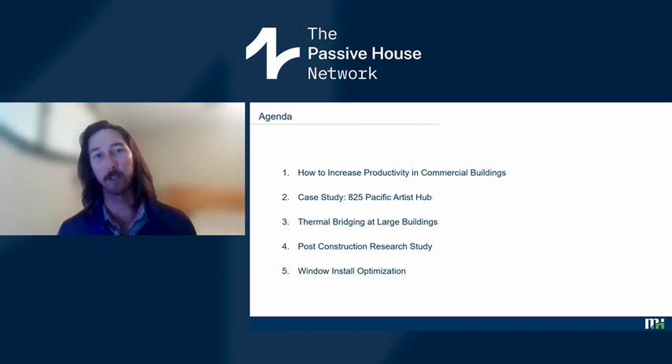The agenda for today: first, how to increase productivity in commercial buildings. Then I'll dive into a case study with a building called 825 Pacific Artist Hub. Then some background information on thermal bridging at large buildings. After that, a post-construction research study based on 825 Pacific Artist Hub, and we'll finish with window install optimization techniques.

Before getting into the case study, I wanted to mention how passive house design principles will improve work productivity, allowing occupants to focus with less distraction from better soundproofing, reducing street noise, improving indoor air quality, and enhancing occupants' perception that they are comfortable and can focus on the task at hand at their office.

This can all be achieved with the isolator, an invention from 1925 by science fiction writer Hugo Gernsback. He felt absolutely plagued with distractions in his office and decided enough was enough. The isolator's mask construction followed passive house design principles: thermal insulation as a vibration buffer, high performance vision area visible through his goggles, an airtight, thermal bridge free enclosure with constant controlled clean air supply. Even the exhalation ports have similarities to heat recovery ventilation cores. And as a bonus, this looks great with any outfit.

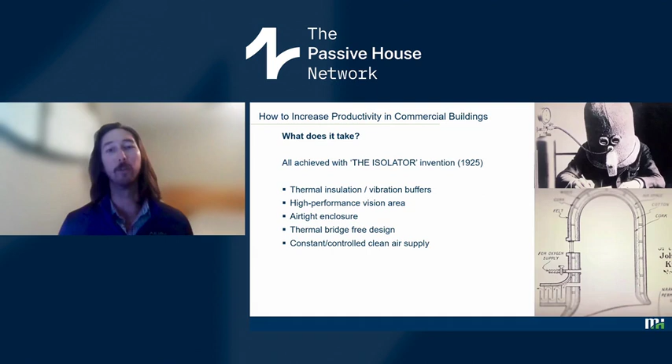But I know masks can be a polarizing subject, as we've seen as of late. So we need to find a more practical solution to increase productivity in the office.

An alternate option is just to build a certified passive house. You can convert the whole building enclosure into the isolator, controlling interior conditioned air with a heat or energy recovery ventilation system, which supplies constant filtered fresh air, exhausting CO2 buildup and airborne viruses.

That's exactly what we did for 825 Pacific Artist Hub. This building was completed in fall of 2021, located in downtown Vancouver, BC, Canada. It's 7 levels plus a 1-level basement of non-combustible construction, which came with new challenges due to high-rise requirements for building enclosure design. It's currently the tallest certified passive house commercial building in Canada, owned by the City of Vancouver and operated by a not-for-profit affiliate.

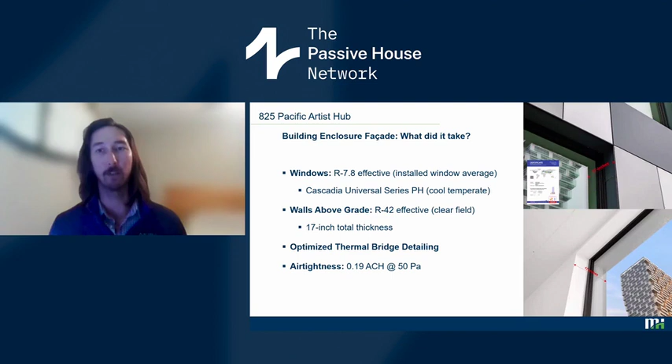Here I've listed the building enclosure facade highlights. The window system thermal resistance is R7.8 effective, and the 17-inch thick walls are R42 effective. The facade design and whole building mitigated heat loss at thermal bridges wherever possible, achieving a great final air tightness result at 0.19 air changes per hour.

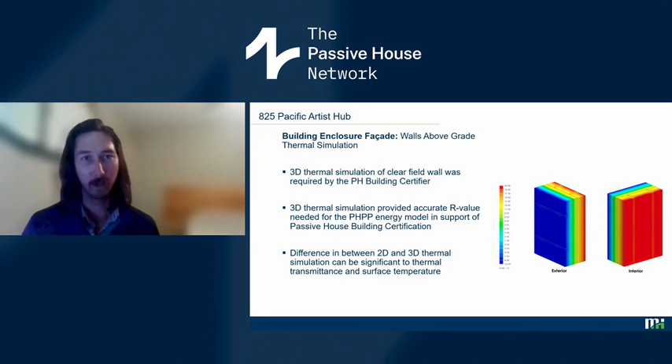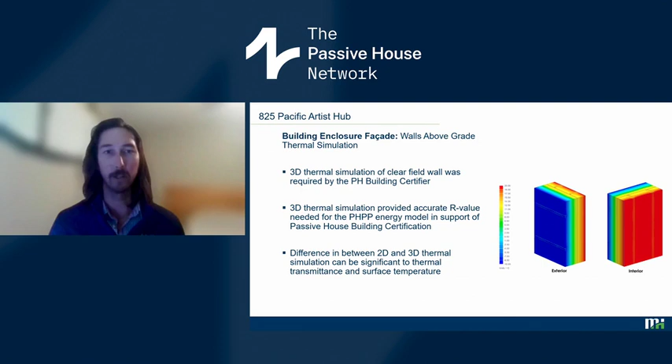For 825 Pacific, MH used a 3D thermal simulation tool for the clear field wall to accurately determine the R value for the energy model, in support of certification required by the Passive House Building Certifier. The 3D thermal simulation was needed because the steel stud framing and cladding attachment brackets impact heat flow in ways that cannot be accurately captured with other methods in 2D. The differences between 2D and 3D thermal simulation can be significant to thermal transmittance and also interior surface temperature.

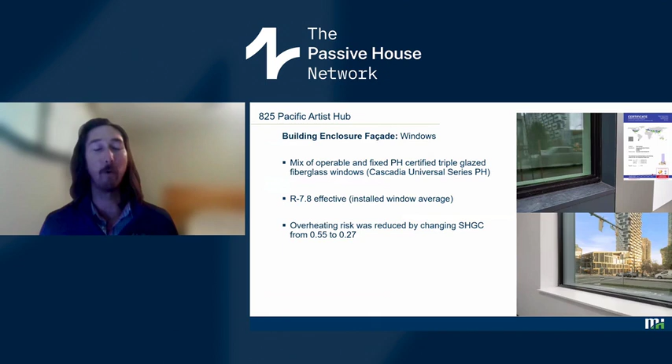Passive House certified triple glazed fiberglass windows by Cascadia were specified, and overheating risk was reduced by changing the solar heat gain coefficient from 0.55 down to 0.27.

Cascadia's fiberglass frame material is combustible, so to install this in a high-rise building, the design had to comply with building code requirements to reduce the chance of fire spread between neighboring windows.

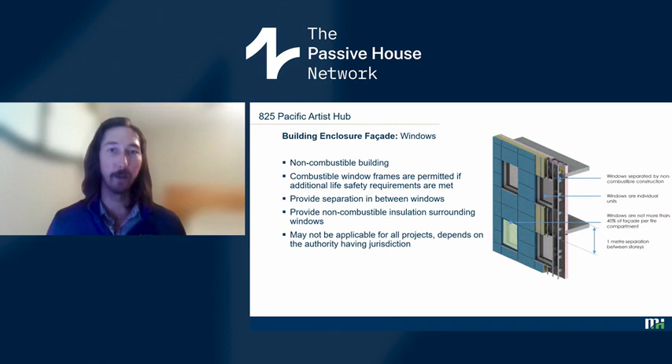The architect's adjustment to the window-to-wall ratio complied with additional life safety building code requirements, and all of this satisfied the City of Vancouver's building department.

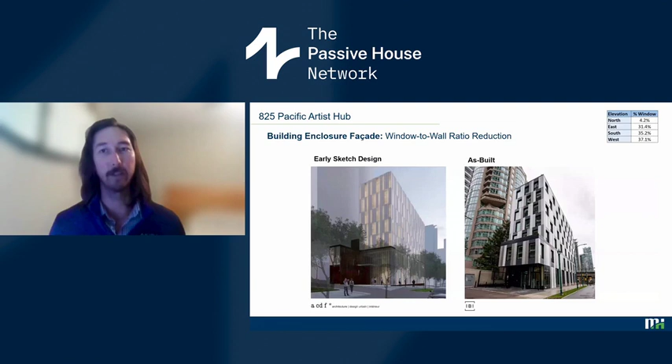For this project, an early stage study conducted by the project architect, IBI Group, refined window-to-wall ratios on all facades and changed the window layout to eliminate narrow windows to decrease heat loss at the window-to-wall transitions.

Due to limited views towards the north, facing an adjacent hotel, the design team decided to locate the stairs, elevator core, and the service rooms along the north facade, shown on the bottom left elevation.

This suited energy conservation strategies by minimizing windows on the north side, reducing heat loss, and improving overall window energy balance by maximizing solar heat gain on the other facades.

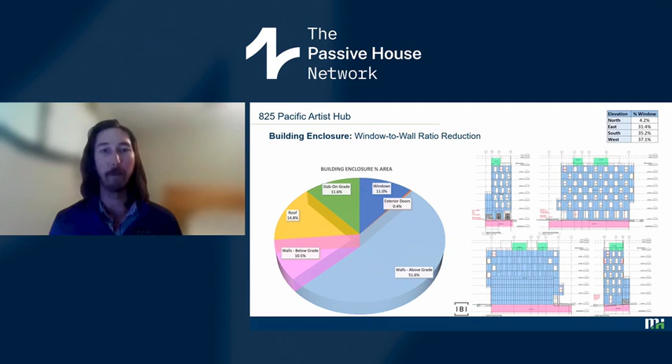Typical of all high-rise buildings, the majority of building enclosure area will be the above-grade walls, which is 51% of the total building enclosure surface area.

The as-built design ended up with 11% windows based on the total building enclosure surface area, but they caused 32% of the heat loss through the building enclosure.

Besides the exterior doors, windows are the only component that disproportionately increase heat loss relative to the surface area because of the windows' poor thermal performance compared to the well-insulated walls, roofs, and floor assemblies.

This is why early stage studies to reduce window-to-wall ratios is an effective strategy to conserve energy. But just like any other building, windows are integral. They connect us to the outdoors, they transmit natural light, and they allow for passive solar gains.

But to improve building energy performance, we need to pay more attention to the window's placement, and that is the recommendation we give on all our projects.

Once window-to-wall ratios and the building enclosure assemblies were established, the project team needed to adjust thermal bridges to account for all heat loss through the building enclosure.

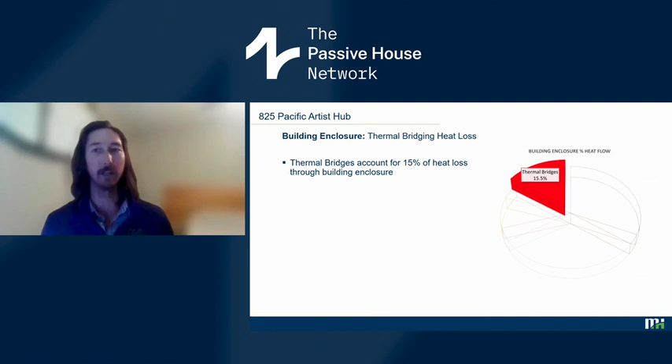Thermal bridges accounted for about 15% of the heat loss through the building enclosure. This is a large piece of the pie considering all thermal bridges were mitigated in the design.

An accurate determination of thermal bridge values for the energy model was a significant factor to the overall building design, in support of Passive House building certification. Using inaccurate thermal bridge values would have unjustly inflated space heating, cooling, and the primary energy renewable demand, the total energy, which may have led to even thicker external walls.

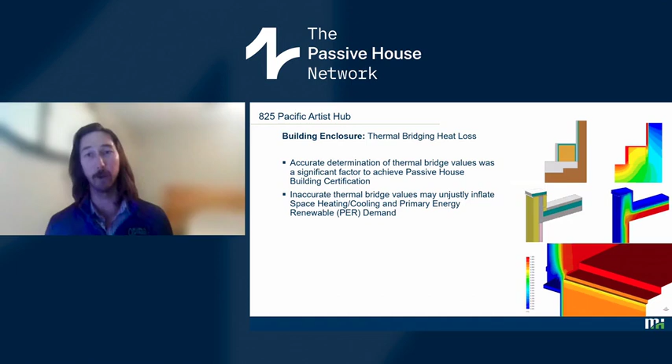This signals where improvement should be focused if needed, because basically all the other thermal bridges on the project combined almost add up to this one window to wall transition thermal bridge. So really this is the low hanging fruit where you'll see the most benefit out of optimization or improvements to that detail.

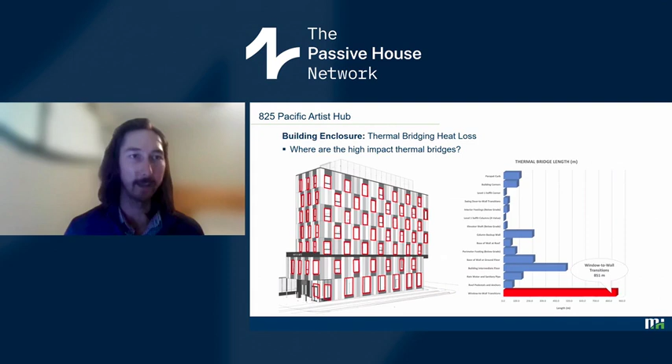High impact thermal bridges are typically the ones with the largest length or quantity. Window to wall transitions often have the largest interface length as shown with the red bar on the bottom right. Windows significantly outweigh all the other lengths of thermal bridges at 851 meters for this particular building.

Now I'd like to review some of the thermal bridges at 825 Pacific and what we did to mitigate the heat loss. This project used an inverted roof system with 8-inch thick XPS rigid insulation that had numerous penetrations from screen posts that surrounded the mechanical units on the rooftop and rooftop anchors at the various terraces and upper roof. The general contractor, Legcor, their superintendent reported some positive feedback using the Armatherm thermal breaks.

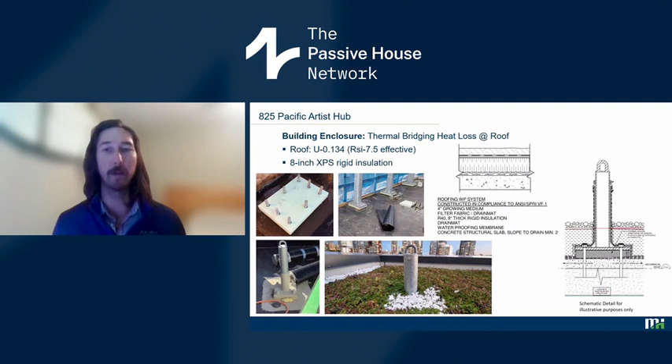Legcor sent Armatherm the size and bolt locations, so all the thermal breaks arrived on site with pilot holes ready for installation. In MH's experience, Armatherm thermal breaks should be minimum 2 inches thick to have a meaningful impact to mitigate thermal bridge heat loss.

At the front entrance vestibule, which is outside of the conditioned thermal space or thermal boundary, if you take a look at the photo on the left, the vestibule concrete curbs were placed on the left and the right of the vestibule, so the concrete floor slab could be placed directly over the 8-inch XPS roof insulation above the heated basement, to mitigate thermal bridge heat loss to only the curbs instead of losing heat from the entire slab if that was placed directly over top of the basement.

For the typical footings, because we have a raft slab, the structural engineer didn't want any insulation, or the footings, or the mass amount of weight of this building to be bearing on anything but concrete or the soil. So to mitigate heat loss, we needed to extend the vertical insulation as far down the foundation wall as we can below the slab on grade junction, which is about 5 feet in this project.

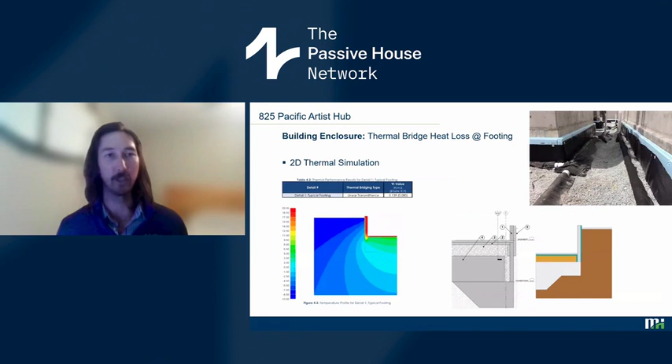And that was with 5 inches of XPS on both the interior side and exterior side of the foundation wall.

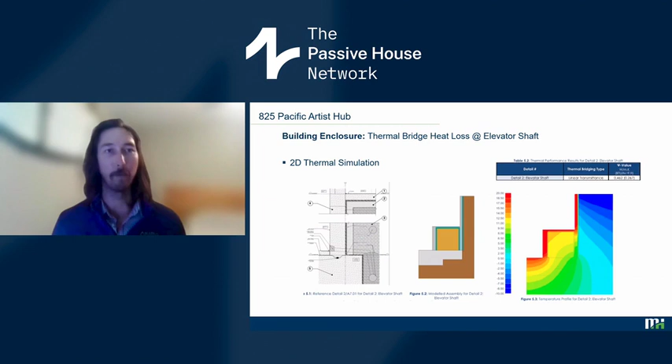We used the same strategy at the footings around the elevator core, which is very similar detailing with 5 inches of XPS on the inside and outside of the foundation walls, running down and basically stopping at the top of the raft slab.

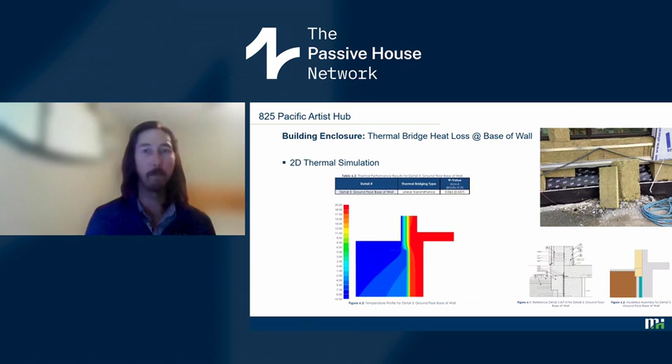The ground floor base of wall detail eliminated through-wall metal flashings to mitigate the thermal bridge, similar to what we saw before on the upper through-wall flashings, where basically we used a peel and stick membrane flashing that sloped away from the building with a tapered mineral wool insulation, trying to install that insulation to have no voids or gaps.

And then with the parapet wall or curbs, when we were on site, we wanted to verify that rigid insulation was installed over the parapet walls prior to the vapor peel and stick membrane to maintain thermal continuity.

So in the end, 825 Pacific Artist Hub achieved Passive House certification awarded by the Passive House Institute.

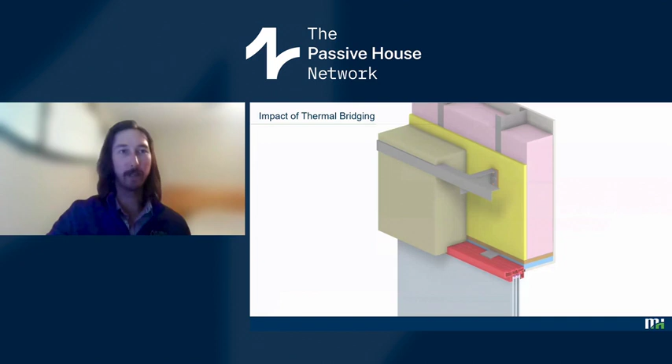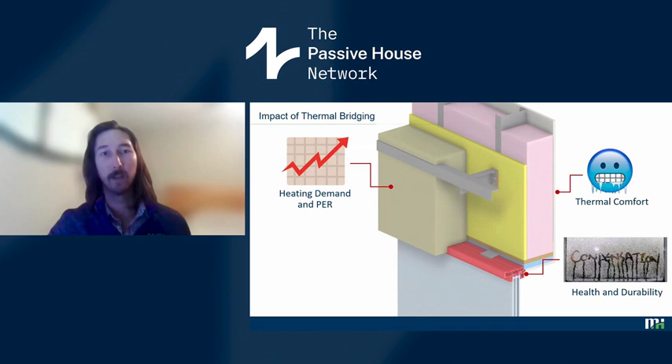So now I'm going to dive into some background on thermal bridging at large buildings. Thermal bridges are a big deal. They can impact your heating demand and total energy demand, which is PER. They can impact occupants' thermal comfort, both occupants and the building itself's health and durability, and thermal bridges will definitely impact our choices for materials and construction.

For those not familiar with assessing thermal bridges to determine what is a good, bad, or ugly value for linear transmittance, this table gives you a general sense of the range. Punch window default install thermal bridges are set at 0.04 watts per meter Kelvin in both Design PH and PHPP until refined by the PH consultant. Good window installations can reduce the thermal bridge to less than 0.01, while bad detailing can lead to values above 0.1.

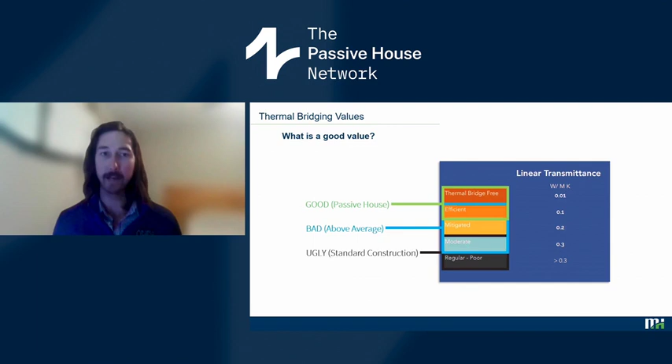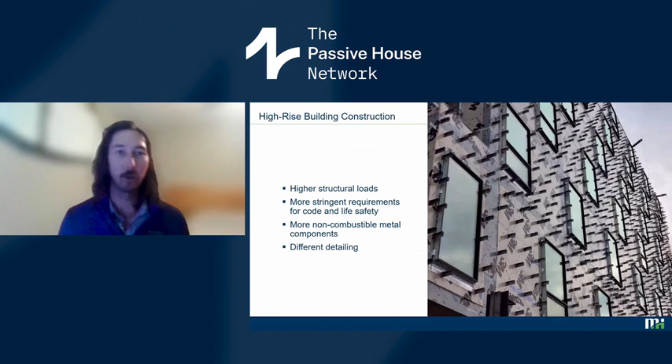Now, when you're dealing with high-rise building construction, you're going to deal with higher structural loads. You're going to use stronger materials like concrete and metal, and windows tend to be aluminum framed. They need to pass higher wind load requirements, water penetration tests, and air tightness requirements. These larger buildings also have more stringent requirements for code and life safety, so generally they need to use non-combustible components.

For cladding attachment systems, we need to focus on reducing thermal bridging, and they also need to support the structural loads for the cladding dead load and wind load. Considered as a secondary structure with influence on thermal performance, we must evaluate our cladding attachment system based on both structural and thermal performance.

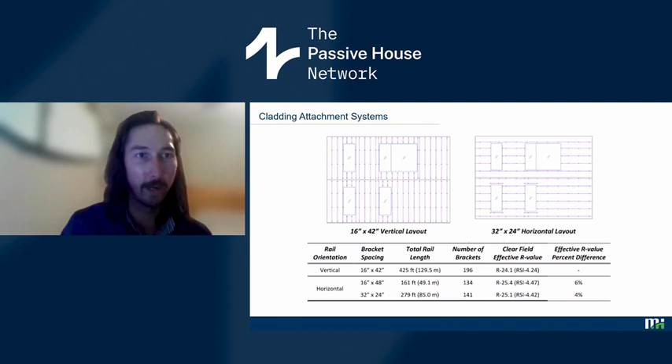Cladding selection and layout will influence the rail orientation and bracket spacing determined by the facade engineer. This is just one example showing the differences in performance between the same wall facade with vertically oriented rails versus horizontal on the right. If you look at this table at the bottom, essentially if you were to switch the orientation to horizontal, we see a slight improvement in effective R value from the vertical rail going from R24.1 to, if oriented horizontally, up to 25.4, so a 6% increase in R value.

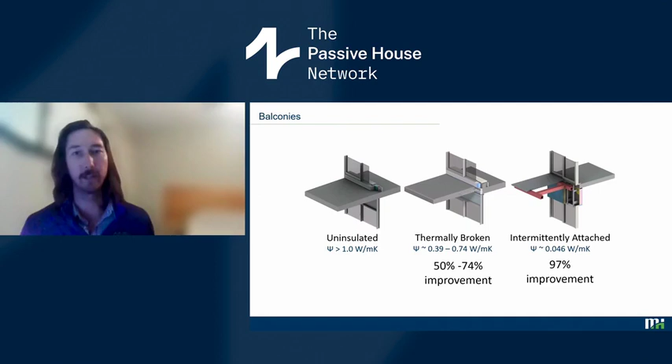As previously mentioned, high impact thermal bridges are typically the ones with the largest length or quantity. For multi-unit residential buildings, balconies often have the largest interface length that must be considered early in the design stage to mitigate heat loss.

But for office buildings that generally don't have balconies, or have a limited amount, the intermediate floors often have the largest interface length that must be considered early in the design stage. But for all large buildings, the window to wall transitions generally have the largest interface length, as shown with the 825 Pacific case study.

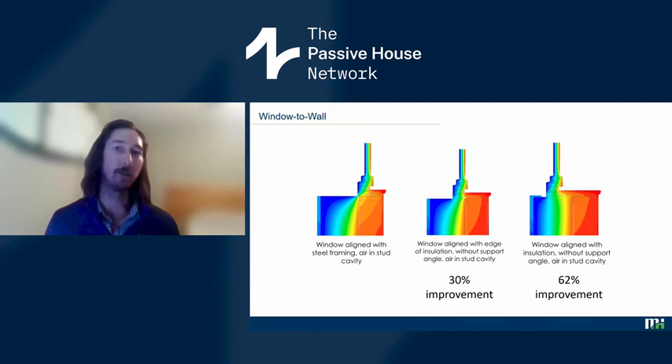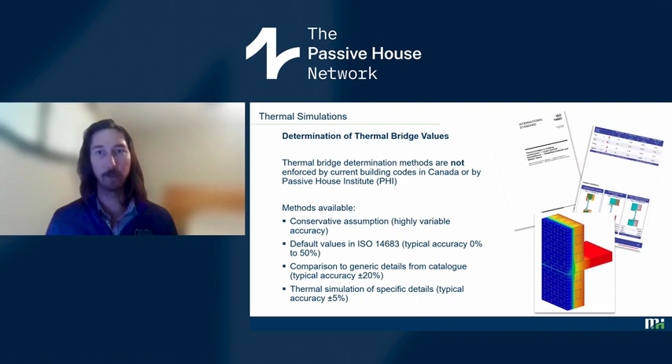So now I'm going to shed some light on thermal bridging analysis. Thermal bridge values are determined for both conventional and passive house projects. The truth is, thermal bridge determination methods are not enforced by current building codes in Canada, US, or the Passive House Institute. So a conservative assumption for a thermal bridge value is basically a guess with an additional buffer for uncertainty. Utilizing accurate thermal bridge values determined by a custom thermal simulation entered in the energy model can actually generate energy savings compared to using a conservative assumption.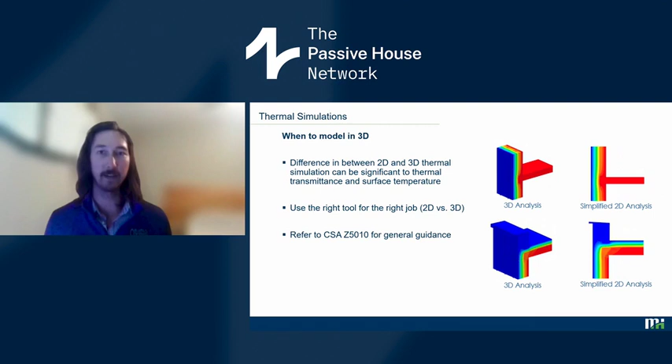This will make meeting energy performance criteria easier. Practitioners should be aware of the importance of accurate thermal bridge values for high impact thermal bridges, where more precise 3D thermal simulations can provide a better assessment of thermal transmittance and interior surface temperatures for condensation and mold risk assessment. Often 2D thermal simulation is good enough, but it's important to recognize when 3D thermal simulation is needed, and CSA Z5010 can be referenced to provide some general guidance on this.

Insulated opaque glazing spandrels for curtain walls is an example where there is significant lateral heat flow through the aluminum framing and the metal backpans that are not fully accounted for in the 2D thermal simulation. So insulated curtain wall spandrel assemblies evaluated in 2D can significantly overestimate the thermal performance compared to what is measured in hot box tests. A 3D spandrel model can directly capture the lateral heat flow and can provide results within about 5% of the measured guarded hot box values.

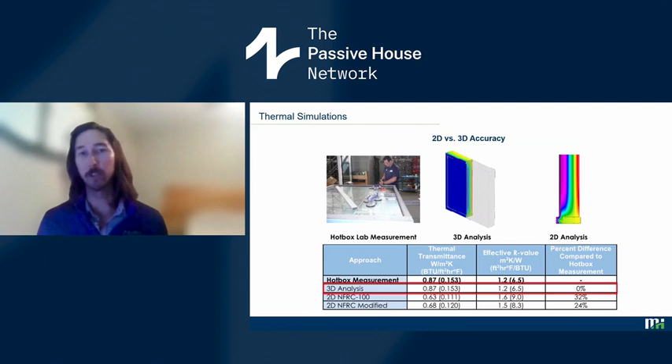In this particular research study, the 3D spandrel model matched the guarded hot box thermal transmittance value, which showed a 0% difference in the results. For building enclosure consultants and architects, the accuracy of our thermal simulation tools is crucial, and 3D thermal simulation is needed for certain components and connection details.

Here's an example of a wall assembly with a bracket and rail cladding attachment system. The intermittent brackets increase heat flow. The steel studs in the backup wall also increase heat flow, creating two types of thermal bridges in one direction. But a single 2D section cannot fully represent the heat flow through the assembly for the intermittent bracket. So how can we calculate the effective clear field R value for this wall?

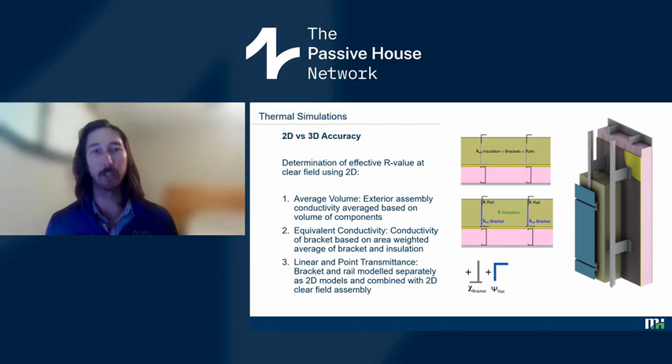There are three methods to determine the effective clear field R value using 2D. The first is the average volume method, using exterior assembly conductivity averaged based on the volume of components. The second is the equivalent conductivity method, where the conductivity of brackets is based on an area weighted average of the bracket and insulation. Or option three, linear and point transmittance, where the bracket and rails are modeled separately in 2D and combined with the 2D clear field assembly.

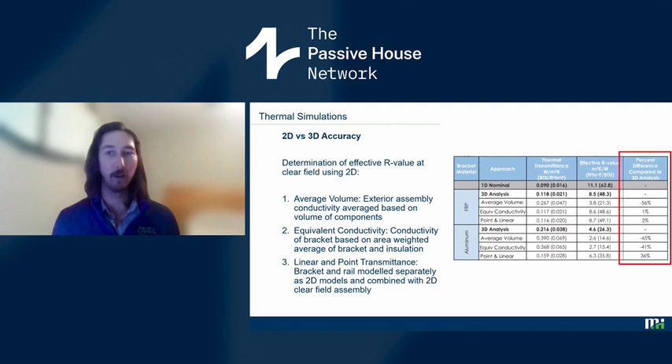If you refer to the column on the far right, you can see how each method using 2D compares to a 3D simulation for the same wall assembly. The FRP, fiber reinforced plastic, brackets show slightly overestimated results using the equivalent conductivity method, increasing the R value by 1%. But the very same method used for aluminum brackets instead decreases the R value by 41%. So ultimately, all three of these 2D methods for this wall are inaccurate compared to the 3D thermal simulation and shouldn't be relied upon.

3D simulation captures lateral heat flow and will often show different temperatures compared to 2D simulation. 2D simulation calculates average temperatures at best, but the coldest temperature is what counts for evaluating the risk of condensation. 3D thermal simulation better reflects reality and is sometimes needed to avoid mold and condensation buildup on the building enclosure's weakest component, which is the windows.

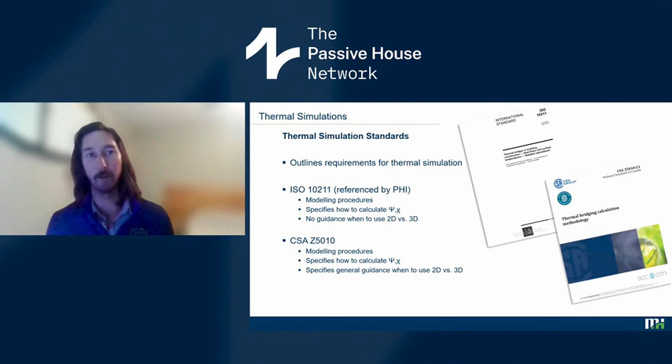The Passive House Institute does not provide guidance to define when 3D thermal simulation is appropriate to generate accurate results. The Canadian Standards Association released the first edition of CSA Z5010 in 2021. This standard provides general guidance to determine what thermal simulation method, 2D or 3D, is acceptable depending on the building transition complexity and the desired output. Currently, CSA Z5010 has not been adopted by any building codes in Canada or the US to standardize how thermal simulation methods are calculated. But owners and project teams developing a passive house building need to be aware of this lack of requirements to calculate thermal bridges.

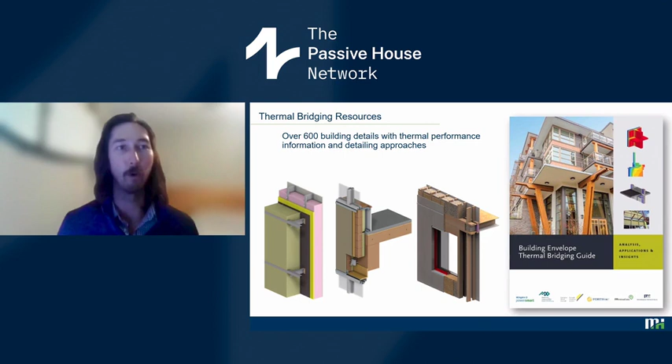Now on to some thermal bridging resources available to us. The first one is the Building Envelope Thermal Bridging Guide that was developed a number of years back, and it's publicly available for download at BC Housing's website. This now includes over 600 building details with thermal performance information and gives you some ideas on how to detail some of these transitions.

And this entire catalog has now transitioned into thermalenvelope.ca, which is very user-friendly. I refer to it on a lot of projects, especially at the beginning stages, when you're looking at clear field assemblies and some of your important transition details.

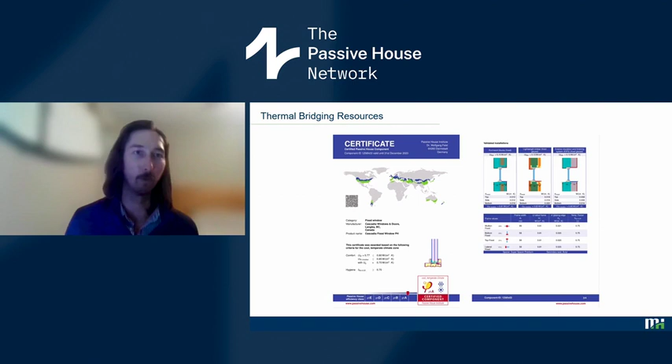Another option is also when you get components certified as a certified passive house component in the passive house database, they'll often have some psi value and chi value information, depending on the type of thermal bridge that it is. This is just an example of a window component certificate that includes three window install options and the calculated psi values for each of those installs.

Morrison Hershfield conducted a post-construction research study based on 825 Pacific to review a common energy conservation strategy that led to its 17-inch thick super insulated wall assembly.

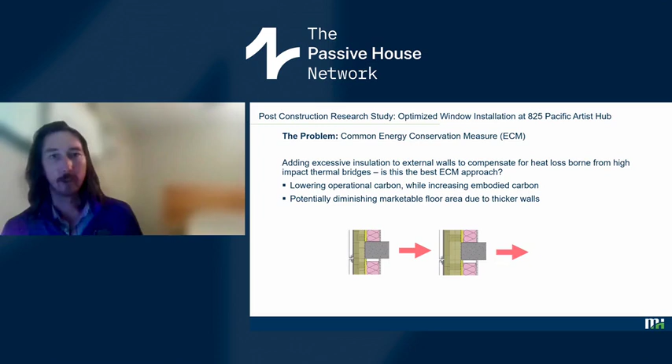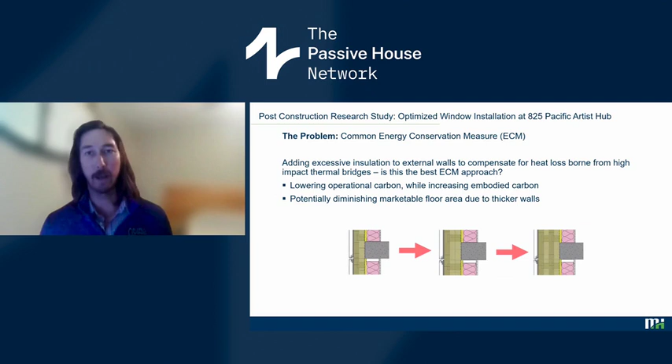The strategy is to add excessive insulation to the external walls to compensate for heat loss borne from high impact thermal bridges. This can be explored in the energy model, but typically reveals diminishing returns to the overall thermal performance. So by taking this path, we're really adding insulation material to lower operational carbon while increasing embodied carbon and potentially diminishing marketable floor area in the process with thicker wall buildups.

A more effective energy conservation approach is to allocate resources to reduce heat loss at high impact thermal bridges that can be optimized. This should be explored on every project. You could start with a review of thermalenvelope.ca or another trusted source to find a thermal bridge detail, or produce a custom thermal simulation of a high impact thermal bridge.

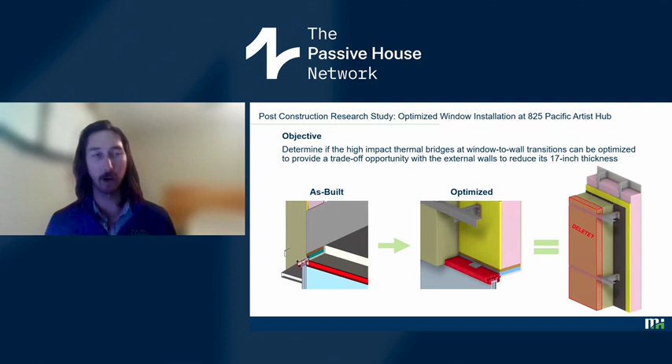So we analyzed two different window install designs for 825 Pacific, the as-built versus the optimized install. The study objective was to determine if the high impact thermal bridges at window to wall transitions can be optimized to provide a trade-off opportunity with the external walls to reduce its 17-inch thickness. A trade-off that produces nearly equivalent energy performance and provides an impact to usable commercial floor area, construction cost, and embodied carbon emissions.

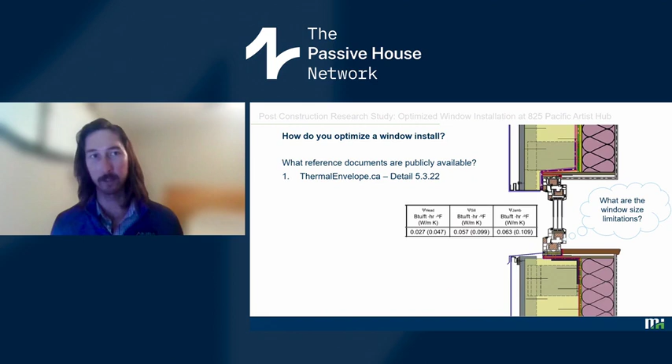So the next question is, how do you optimize a window install? What reference documents are publicly available? Here's one thermal bridge reference example from thermalenvelope.ca. This install uses a metal support angle at the sill, but this should be used with caution because it might not be suitable for your project. A structural analysis is needed to determine the window size limitations based on this connection detail, and if the design can sustain the project's wind loading, which is generally a problem as you get to larger and taller buildings.

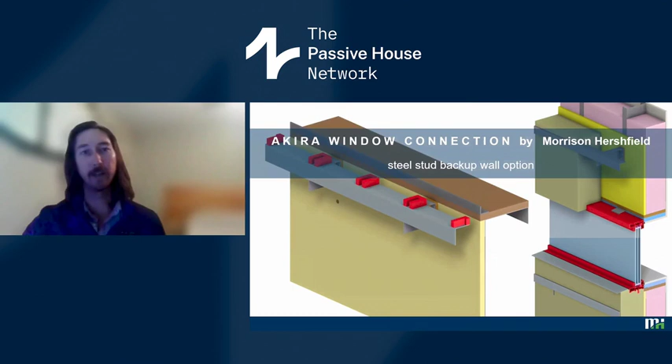Introducing Akira Window Connection by Morrison Hershfield. This is our steel stud backup wall option.

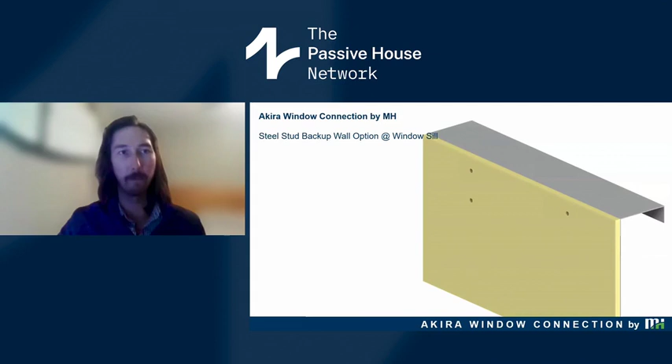So to show you how this will work, I'm going to go through a little windowsill sequencing detail. Because this was based on our 825 Pacific Artist Hub case study, we wanted to use the exact same backup wall system. This is 2x6 steel studs at 16 inches on center, which were 16 gauge. Once that's framed up, we're going to install our exterior 5/8 dense glass. We're going to line the rough opening with 3/4 inch plywood. We're going to install, at the edge of the sill, this continuous aluminum angle. In a lot of conventional construction, this is used as a back dam for water ingress management, but in our case, it's used as part of the wind loading system to connect the window to.

Mind you, these are isometric images captured from our 3D thermal models. They don't actually use any membranes or products that don't have impact to thermal performance. So although we're showing our brackets installed here directly over the dense glass, just note that you're going to have a continuous air and moisture barrier at that interface before these brackets are installed.

The brackets are just generic stainless steel brackets positioned directly into the steel studs on the wall, spaced at 16 inches on center. Then we're putting a 2-inch by 2-inch 18 gauge galvanized steel angle over top of those brackets.

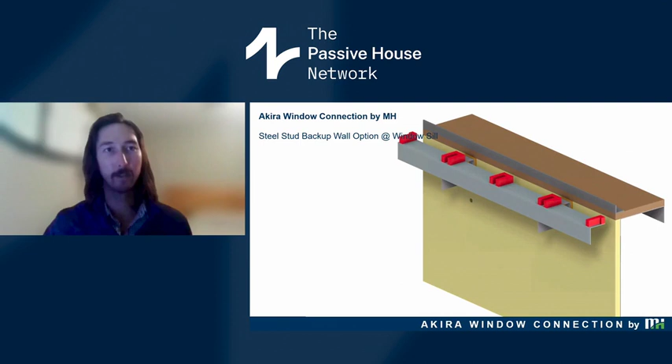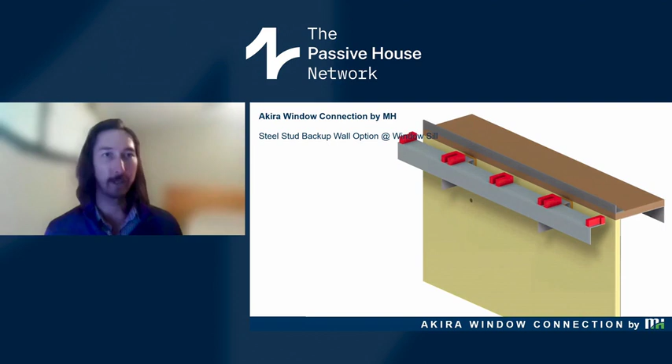This is going to become what we're positioning our window over. So like you would do in a normal window rough opening, you're going to line it with plastic horseshoe shims, which are generally spaced as dictated by the window manufacturer—but for this particular manufacturer, it was 8 inches on center.

Then we're going to place our window in, and again we're going to use that aluminum angle at the back there in the rough opening to fasten into the window to pick up the wind load. Then we're going to continue on with the cladding attachment system.

This used a larger bracket with horizontal rails. Then in the cavity directly below the window, we want to fill all those void spaces with insulation—in this case we decided to use a loose fill mineral wool.

Then you're going to add your insulation to the exterior. The actual project used 8 inches of exterior mineral wool, but for this particular model we just used 7 inches.

Then, to further improve and lower the psi values for this window install, we wanted to line the rough opening with 1 inch of XPS. And when we install in the side cavities, we install batt insulation, and then we cap it off with our interior finish, which in this case is just gypsum wall board.

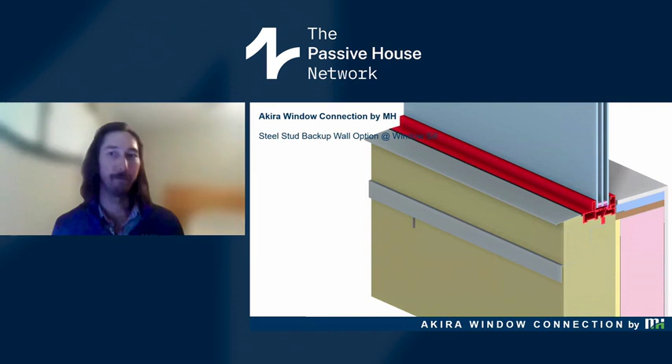Sorry, just another important thing to note: the Akira window connection shifts the window position outwards to basically align the window frame's interior edge with the wall sheathing's exterior face. In this case, the window frame is over-insulated in the design, which is really not imperative, as it's only providing a minimal improvement to the psi value based on the narrow window frame analyzed in this case.

So we decided to use the Cascadia Universal Series window frame in this model, since we already had it previously modeled in 3D from the 825 Pacific Artist Hub project. This just gives you a view of the underside of the install.

Once insulation is installed, you can see what separates this from typical details that use continuous angles is that, similar to how we're improving thermal performance of our clear field walls by getting rid of continuous Z-girts—because we're basically attaching our warm backup wall, which has a continuous metal bridging through our exterior insulation going to our cladding—we're avoiding that with our intermittent clips or brackets.

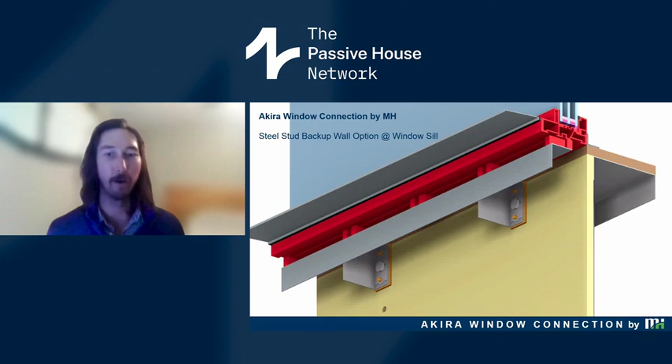We're using that same principle here to support the window, where, as you can see with this continuous angle, there's a gap now between the backup wall and the edge of that continuous angle. So now we have that space where we can add our exterior insulation and butt it directly to the underside of the frame without interruptions from high conductive materials like metal.

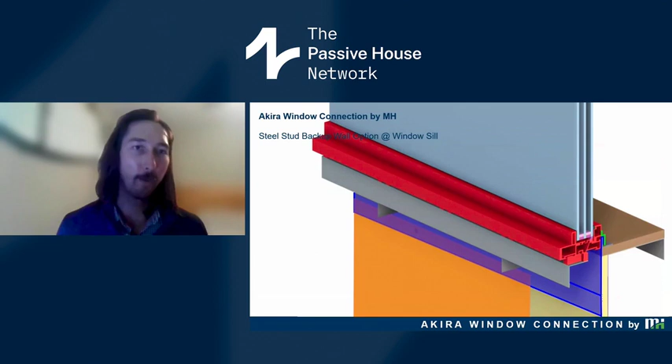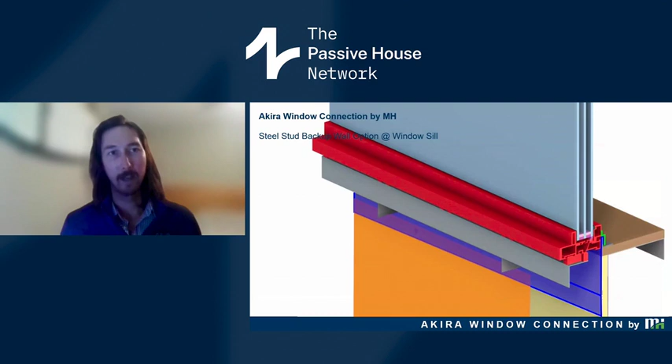This is giving you an idea of one way to install the air and moisture barriers. Picture this window and support system not installed yet, just the rough opening. You're going to line it with your peel and stick membrane, shown as the blue hatched area, which wraps up and over your aluminum angle in the rough opening. Once you have your support system and window installed, you attach this green tape, a high performance air barrier tape, connecting your pre-stripping along the rough opening to the window frame. In the field of the wall, shown in orange hatch, is your typical air moisture barrier membrane. This is how we maintain air barrier continuity at this transition.

Table 2 shows the maximum window width and height based on the design wind load. At 825 Pacific Artist Hub, at 7 stories, would fall under the second column where the windows could be 12 feet tall with an unlimited width.

The window schedule for 825 Pacific has varying window sizes. The images on the bottom should give you an idea of how many intermittent brackets would be required based on the window's width and height. For example, the bottom left image is the largest window on the project, about 11 feet 2 inches tall, requiring 7 brackets to support that window's dead load. As you get to smaller windows, we can increase the spacing, and if needed, get away with 3 brackets, as you can see with the windows on the far right.

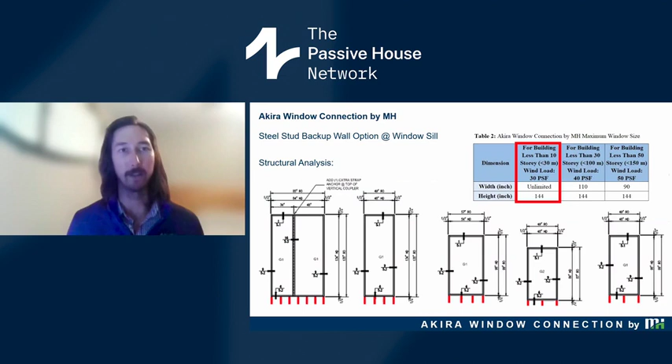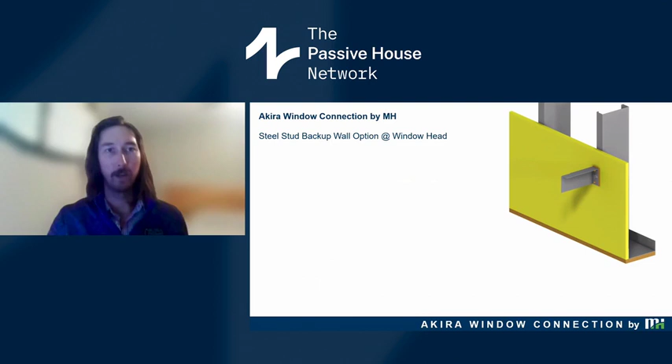Now to dive into the window head install sequencing. We start off with our 16 gauge 2x6 steel studs, spaced at 16 inches on center. We put on our 5/8 DensGlass, then line the rough opening with our plywood, 3/8 plywood.

We put on our wall brackets at some point to support our cladding, and we have our horizontal rail system to support the cladding. Then our windows are installed, and that shows you an example of one of the strap anchors, what they use for Cascadia windows.

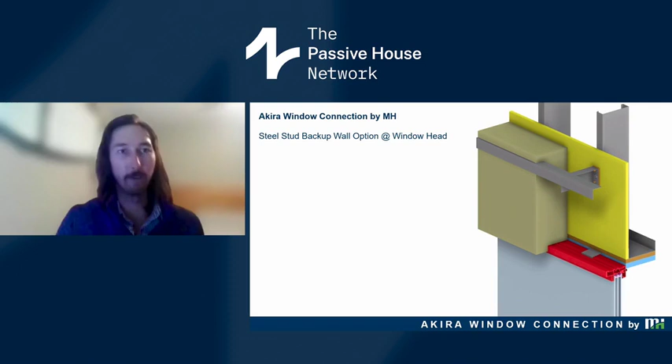We install our multiple layers of exterior insulation. In this case, the goal was to produce the lowest psi value possible, so we did over-insulate the frame with the exterior insulation. We also lined the rough opening again with 1-inch XPS, for the sill, head, and jambs. Then we install our interior batt insulation and put on our interior finish, which in this case again was gypsum wallboard.

I just wanted to give you an idea of how the air and moisture barrier could be installed for this project. Prior to the window being installed, we use that light blue membrane, likely a vapor impermeable self-adhered membrane, or peel and stick, to line the rough opening as pre-stripping. Then we install the window itself, and we can install, shown in green here on the interior, how we connect the air barriers from the wall to the window.

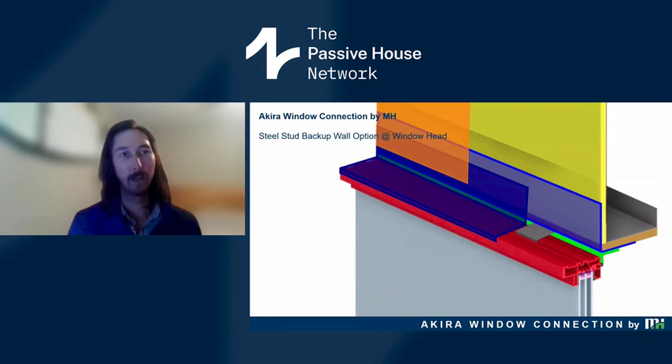Because of my building enclosure consulting side, I'm a little worried that this backside of the tape might not be able to handle some water that might find its way back to this transition. So I'm going to install an extra layer of self-adhesive membrane to line the wall and across the top of the window frame. Then all of this is going to be positively lapped by this orange membrane, which is our field air and moisture barrier.

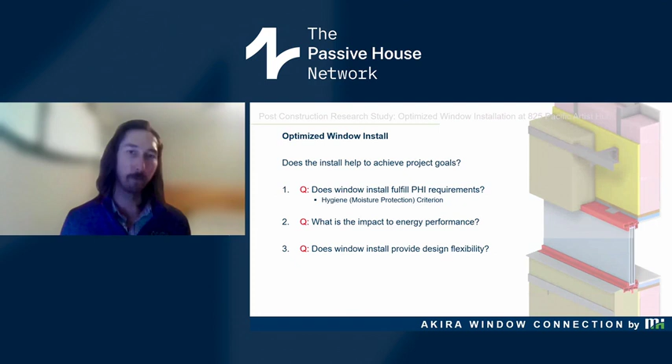For window install design options, there are 3 fundamental questions the project team should consider early in the design stage. First, does the project window install fulfill the Passive House Institute requirements? Second, what is the impact to the energy performance? Third, does the window install provide design flexibility for other building components?

For question 1, the window install must fulfill the hygiene criterion. The information needed is obtained from the thermal simulation to determine the temperature factor at the coldest spot on the interior surface. The window install must meet or exceed the temperature factor developed by PHI for the project's climate zone. This is a moisture protection check to ensure that the window to wall transition details are planned and executed to avoid mold and condensation.

Using the Akira window connection at the head transition, the minimum temperature factor is 0.76. This does fulfill the hygiene criterion because it's over 0.7. The minimum temperature factor is 0.81 at the sill transition, which again fulfills the hygiene criterion as well.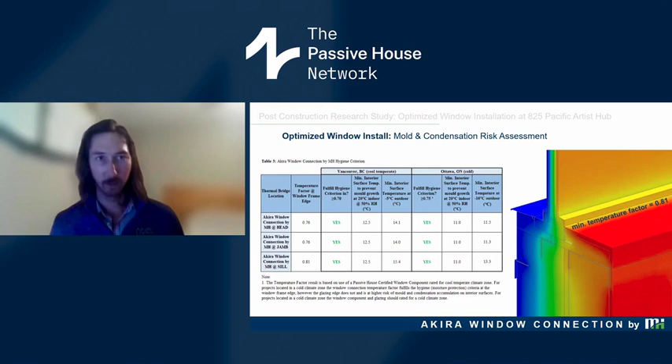Note that the thermal simulation includes a PH window rated for a cool temperate climate zone. Table 3 shows the temperature factors for the head, jamb, and sill transitions. This variable completes the FRSI formula so we can calculate the minimum interior surface temperature to assess the risk of mold accumulation based on the climate zone boundary conditions.

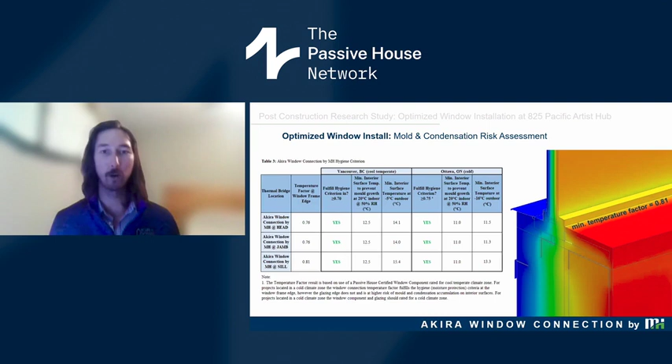For projects located in cold climate zones, the window connection temperature factor fulfills the moisture protection criteria at the window frame edge. However, the glazing edge does not, and it is at a higher risk of mold and condensation accumulation on the interior surfaces. So the window component and glazing should be rated for the appropriate climate zone.

Regarding questions 2 and 3, the same thermal simulation is used to calculate the thermal bridge value to determine the building energy performance impact. If completed early in the design phase, the Passive House consultant can help explore design changes to reduce external wall thickness.

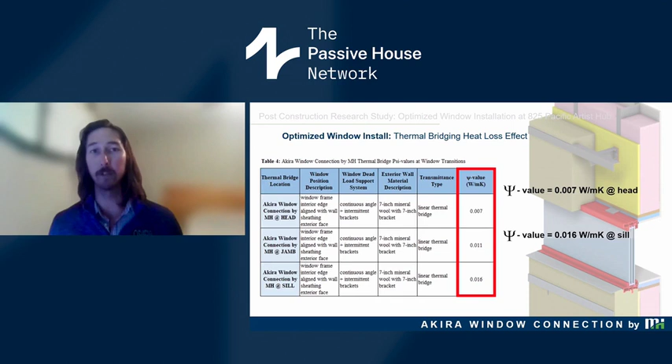Table 4 shows the psi value results for the Akira window connection with the steel stud backup wall option. The 3D thermal simulation calculated excellent, nearly thermal bridge-free results at the head, sill, and jambs, shown in the far right column.

After running variants in PHPP with new psi values from the Akira window connection, this resulted in reduced window install heat loss, creating energy conservation savings and providing more design flexibility for us to play with. The amount of energy savings compared to the as-built scenario can be seen in table 5 in the second row.

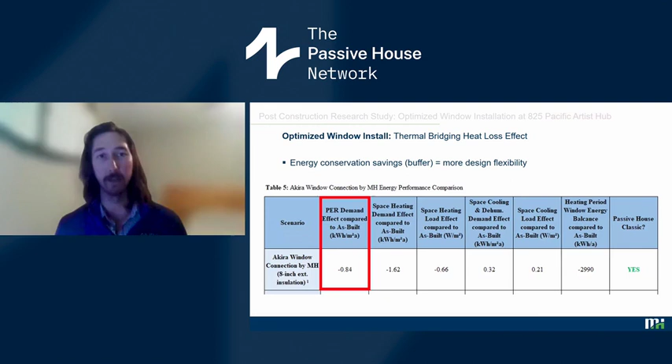This is an enhanced view of the second row. The limiting factor for this project, as for most large buildings, is the PER demand, or the total energy demand. By simply improving the window install psi values, we reduced the PER demand by 0.84 kilowatt hours per meter squared per year. So the PER energy savings is now a buffer providing design flexibility to reevaluate the external walls to potentially reduce insulation thickness.

By optimizing the window install with the Akira window connection, we concluded the wall's 8-inch thick exterior insulation in the as-built scenario could actually be reduced to 6 inches and still achieve Passive House Classic building certification.

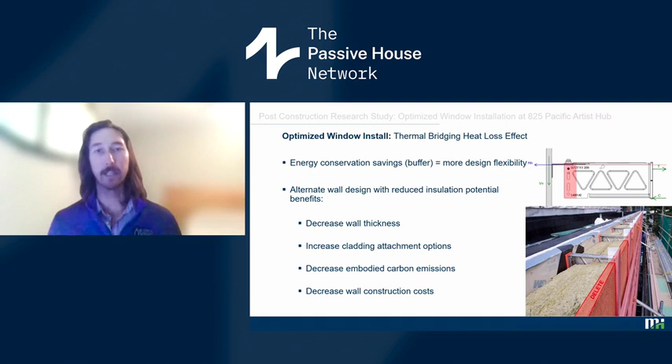An alternate wall design with reduced insulation can have several potential benefits: we can decrease wall thickness, increase cladding attachment options, decrease embodied carbon emissions, and decrease wall construction costs.

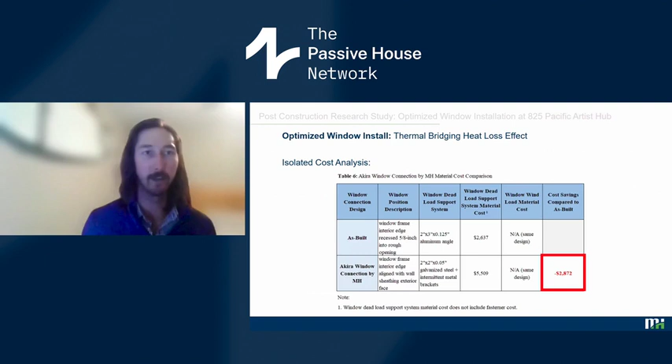Table 6 is an isolated cost analysis in Canadian dollars on the window install methods alone, showing an increase in material cost to use the Akira window connection compared to the as-built method. For the entire 7-story building at 825 Pacific, it would have cost just shy of $3,000 extra in material costs to go to the Akira window connection instead of the as-built method.

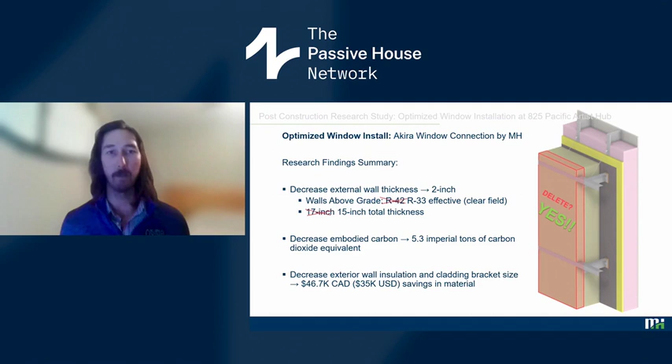By optimizing the window install, the exterior wall insulation can be reduced by 2 inches, saving over 3,000 cubic feet of mineral wool insulation from being installed on the walls. This equates to less raw material extracted, processed, manufactured, transported, installed, and disposed of at the end of the building's service life—approximately 5.3 imperial tons of carbon dioxide equivalent averted. Reduced exterior wall insulation and reduced cladding bracket size is estimated to save about, again, $35,000 US in material costs.

With thinner walls, there may be an opportunity to increase interior floor area by 1.2% if realized early in the design stage, assuming no variance permitted to encroach over property setbacks due to the exterior wall insulation. This demonstrates how we can leverage thermal simulations at high impact thermal bridges, such as window-to-wall transitions, to impact the overall building design and the building owner's bottom line.

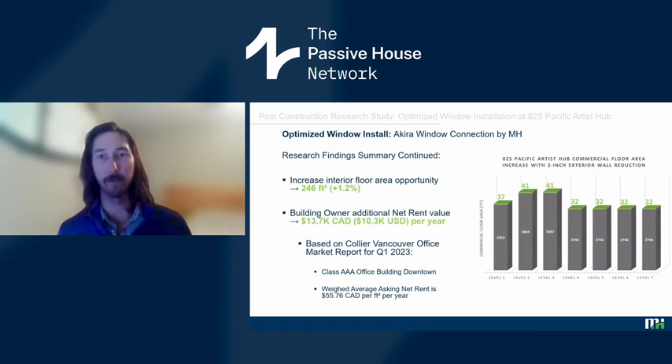Digging into this Colliers Vancouver office market report for Q1 of this year, it mentioned that the weighted average asking net rent for a commercial property is about $55.76 Canadian per square foot per year. By adding this extra 246 square feet to this 7-story building, we are putting essentially an extra 13,000, just shy of 14,000 Canadian dollars, or just over 10,000 US dollars, in the building owner's pocket each year. You can imagine if this was a much larger building, this would be a substantial number that would definitely be attractive to any building owner or developer.

Aside from superior structural strength, thermal performance, and window size freedom that an Akira window connection provides, the question I have for the audience, in terms of overall window install complexity—including install options with or without a plywood window buck, and considering proper moisture and air barrier detailing—which of these two options appears simpler and faster to construct? The detail on the left is the same one we showed earlier from thermalenvelope.ca, which integrates a plywood window buck to try to get that window position more or less aligned with the exterior insulation.

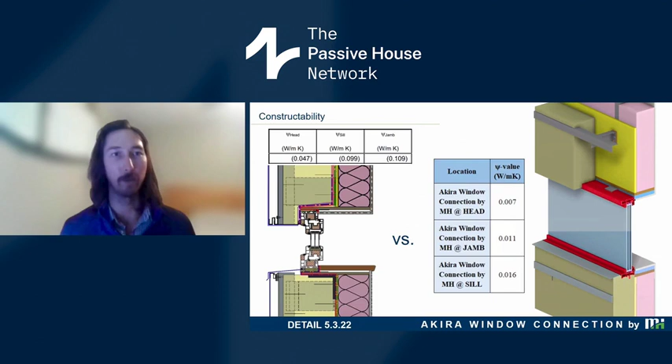That's causing us to need to use a thick steel angle at the bottom to support the window's dead load, and it's also requiring more complex shapes to wrap our air and moisture barriers around, going from the backup wall to wrap back to the window. Compare that to what I've shown you with the Akira window connection, where the rough opening detailing is very similar to conventional practices. So I think the adoption of this would be quite seamless for a lot of project teams.

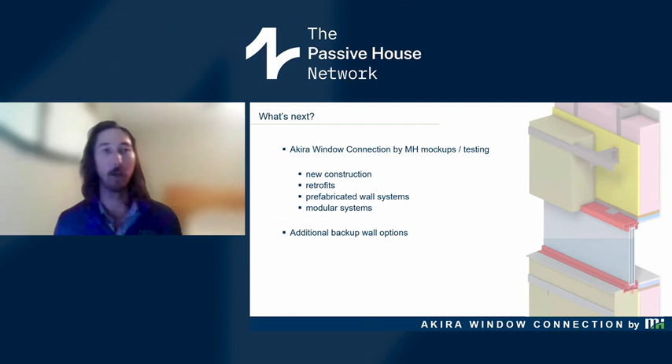The next step is for us to assemble some mock-ups for testing. These mock-ups would be suitable for new construction, retrofits, prefabricated wall systems, and even modular systems. We're also in the works of adding additional thermal bridge data for different backup wall options that will be added to thermalenvelope.ca later this year.

In conclusion, for modeling tools, you need to leverage energy models in design. You can use these to help identify high impact thermal bridges, and you need to leverage custom thermal simulations to optimize those high impact thermal bridges.

So you can improve thermal performance and resistance to mold and condensation. You can potentially decrease your external wall thickness, which could increase interior floor area. And this could decrease embodied carbon emissions, meaning less building materials are needed for the project.

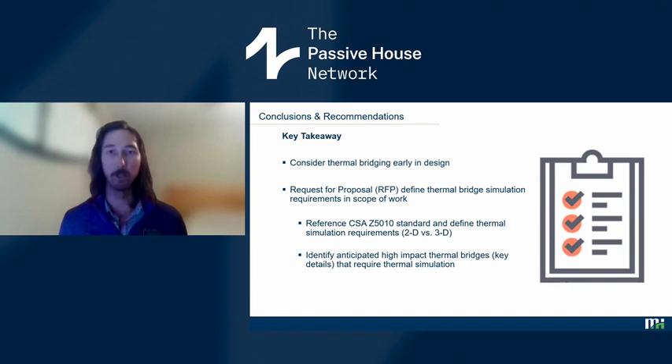A key takeaway for owners developing a passive house building is to define thermal bridge simulation requirements at project conception, so we can allocate appropriate resources when issuing a request for proposal for architectural and engineering services. This RFP scope of services could reference something like the CSA Z5010 standard, or define custom thermal simulation requirements, whether 2D or 3D thermal simulations are required at anticipated high impact thermal bridges.

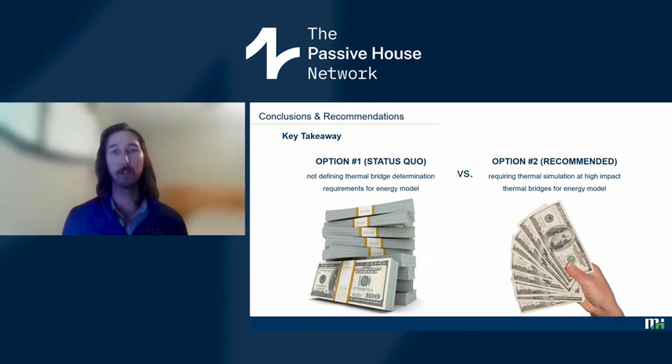And the question I have for developers out there in the audience: would you rather marginally increase design soft costs with additional 3D thermal simulations to improve the building design, or increase hard costs as a result of conservative thermal bridge assumptions that you had seemingly no control over?

And that's it. Thank you very much.